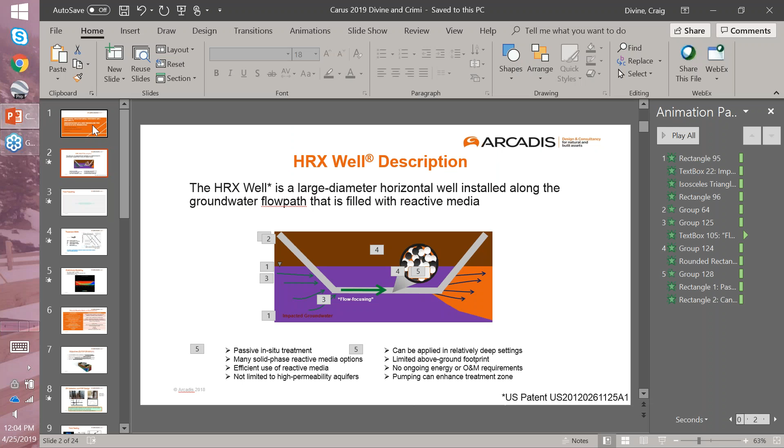Next, we will have Dr. Michelle Crimi. Dr. Michelle Crimi is the Director of Engineering and Management and a professor jointly appointed in the Reh School of Business and the Institute for Sustainable Environment at Clarkson University. Her areas of research interest include the development of in situ remediation technologies for treating contaminated groundwater, chemical oxidation of organic contaminants, impacts of in situ remediation on aquifer quality, and the integration of treatment technologies for optimized risk reduction. She has been PI or co-PI on several research projects focused on the treatment of groundwater contaminants, funded primarily by the Department of Defense Strategic Environmental Research and Development Program, SERDP, and the Environmental Security Technology Certification Program, ESTCP. Her projects are often conducted in partnership with industry and consulting organizations and often have a strong technology transfer focus with the objectives of moving technologies from the laboratory to full-scale adoption by developing guidance, tools, protocols, and workshops to support field application.

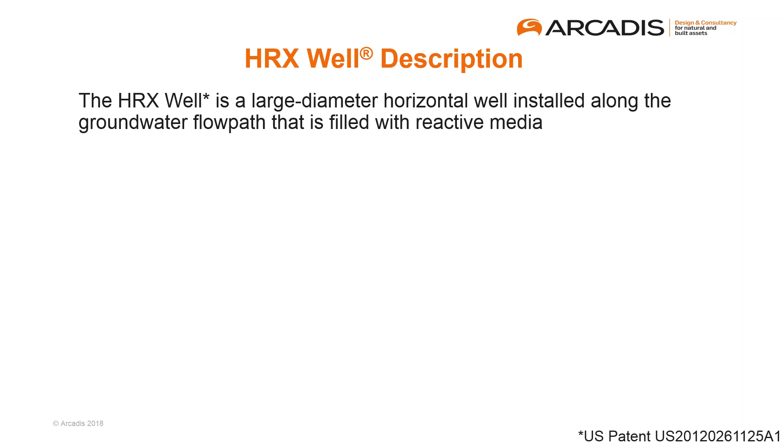So what is an HRX well? It is a large diameter horizontal well. And when I say large diameter, I'm talking 6, 8, 12 inches in diameter, or even larger if possible. That's installed along the groundwater flow path, and it's filled with a reactive media. So if we have a conceptual aquifer here, the triangle represents the water table, the brown is the unsaturated zone, and flow is left to right.

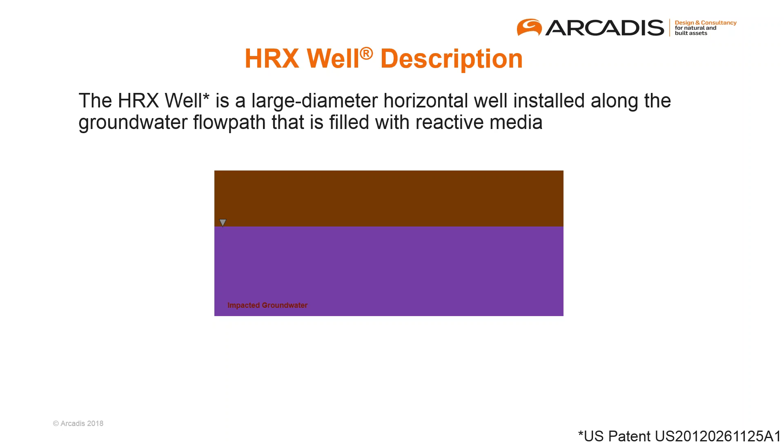You could install this large diameter well, in this case it's a double-ended well, below the water table, again along groundwater flow direction, and then exiting on the down gradient side. And in this case, there would be a screen on the left side, on the up gradient side, and a screen on the down gradient side, and then a cased section in the middle.

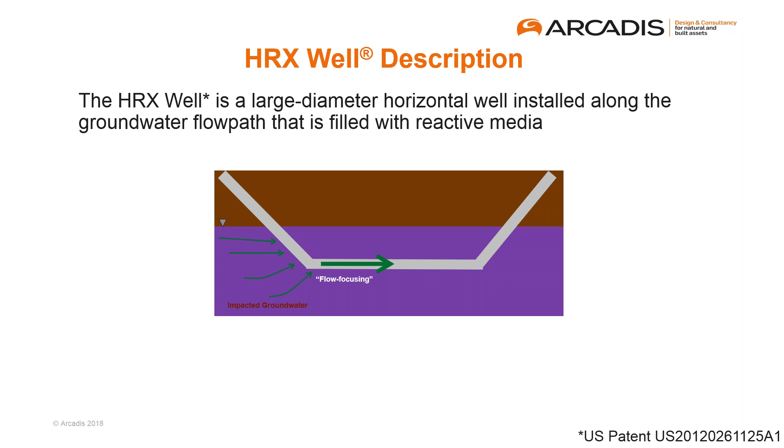And because this large diameter well has a much higher permeability than the surrounding formation, it acts as an engineered high permeability feature, like a fracture or a karst conduit. And therefore, there will be a flow focusing phenomena. That is, groundwater will preferentially flow into that well. And then, of course, while it's in that well, if it's contaminated, it will react with some type of reactive media present in the well, and then flow out the down gradient side treated.

And so, in a sense, you could consider it a form of a permeable reactive barrier, a PRB. And so it has many of the advantages and similarities of a more conventional PRB, like a trench-based PRB. It's a flux control technology, and it's passive. There are some, I think, distinct advantages, though, to this sort of configuration. First is that, of course, you're not as depth limited. Horizontal wells can be installed at much greater depths than trenches, and certainly from a cost perspective, that difference becomes greater as you go to deeper depths.

It has a limited above ground footprint. There's no ongoing operation or maintenance requirements. I think one of the more distinct aspects compared to a conventional trench-based PRB is that because groundwater is focused into that horizontal well, the media usage is very efficient. In many trench-based PRBs, you may have zones of the PRB that don't see a lot of contaminant flux, and yet you need to put media there. And so at the end of the day, you end up using quite a bit of media.

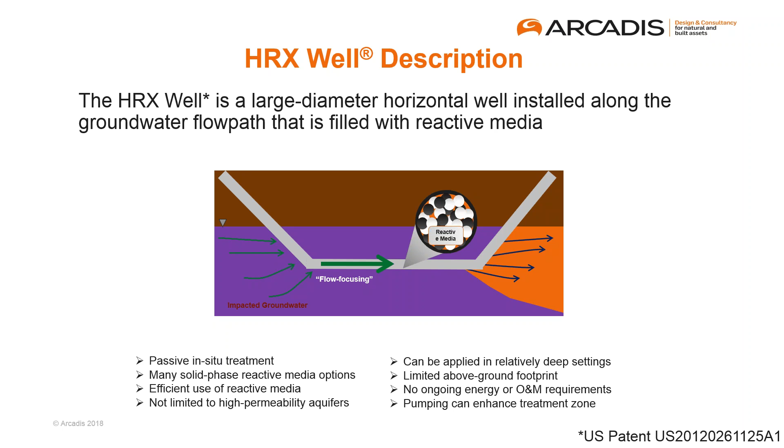And in this case, because of the efficiency of the hydraulics, much less reactive media is used. And I think that creates an opportunity to use much more expensive media because you're using much less of it. So the opportunity to have more tailored or designer media is represented. And there's also the potential to use multiple media types in series to address either pretreatment needs or multiple contaminants.

I present this concept at a few forums, and sometimes the hydraulics are a little bit complicated to envision if it's the first time you've seen it. So I put together this really simple numerical flow and transport model using pFlow, which is a USGS Java-based code, really simple to use. And this is a plan view of an HRX well. So the white represents the surrounding aquifer. The blue would represent the well itself, so a very high permeability. And then the green is the cased section, so no flow across that green.

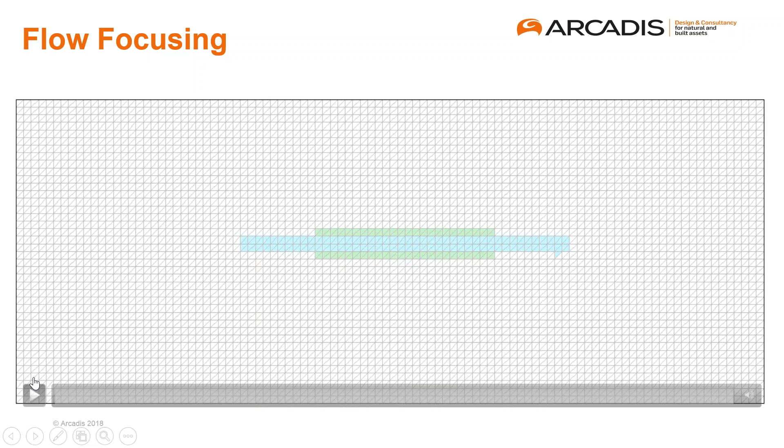So the blue is a very high permeability zone. The green is a very low permeability zone, and the white is sort of a middle permeability zone representing the ambient formation. And of course, this is simply two-dimensional, but it helps understand the hydraulics. So I ran the model, put it into a video, and I'll sort of talk through as it plays here. Again, flow is left to right. And this is the permeability distribution. So you can see the blue is 1 and the green is 10 to the minus 12, and the white is 0.001.

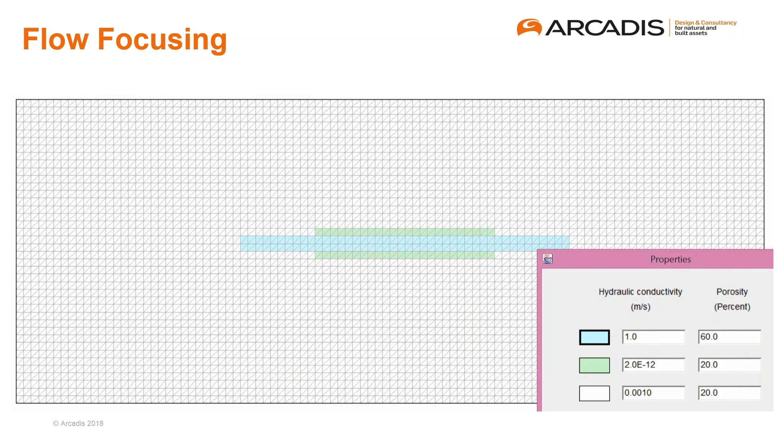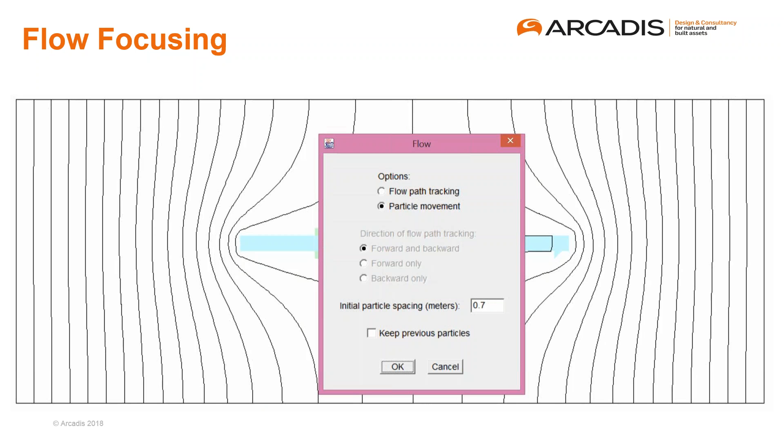So the first thing that we'll do here is just contour the heads. So you can see the head contours, and you can see them bend around the inlet and out of the outlet, and that's what creates that flow focusing. And we can run flow lines. If we start the flow line right in the center, of course, it runs right through the well, left to right. And if we're at the edge of the domain, it doesn't go through the well, but you can see some bending effect.

And as you get closer and closer to the well, that bending effect becomes more severe until those flow lines are captured. And so those flow lines that enter the well, of course, represent the boundaries of the treatment or capture zone. So any flow line that enters the well, and assuming that the reactive media is appropriate, then gets treated.

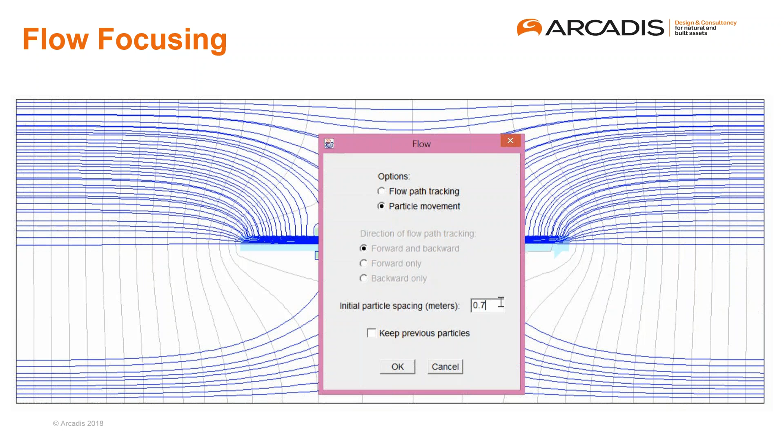And then on the right-hand side, of course, it's symmetrical. That right-hand side represents the treatment zone. And it's symmetrical top to bottom as well. So you get a similar sort of behavior. And of course, this is a simplified system, isotropic and homogeneous, but it at least helps you understand this flow focusing effect. And of course, the degree of that flow focusing relates to the contrast in permeabilities and some other kind of specific aspects of the geometry.

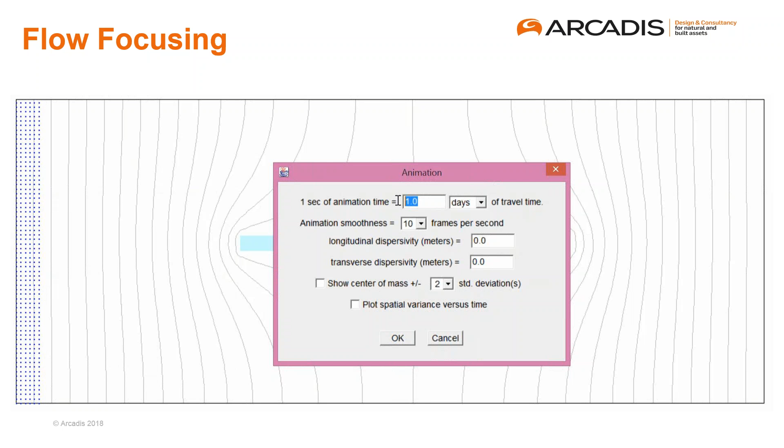In this next part of the simulation, I dropped some particles on the left, and you can see how they'll flow. They'll follow those flow lines, but you also see the relative rate of transport. And so the particles in the middle, you'll see, will transport very rapidly. And then you can see the particles at the end that don't go into the well, that bend toward the well, but then eventually kind of pass by, and again are sort of defined by that treatment zone or capture zone.

Right, so all those ones that went in the well, and on the right side, that's all treated water. And then these particles that are passing by now, passing by the well, that's the untreated flow lines. And then you can see they sort of bend out and follow the contours of that treatment zone. Okay, hopefully that was helpful. So that's sort of the concept.

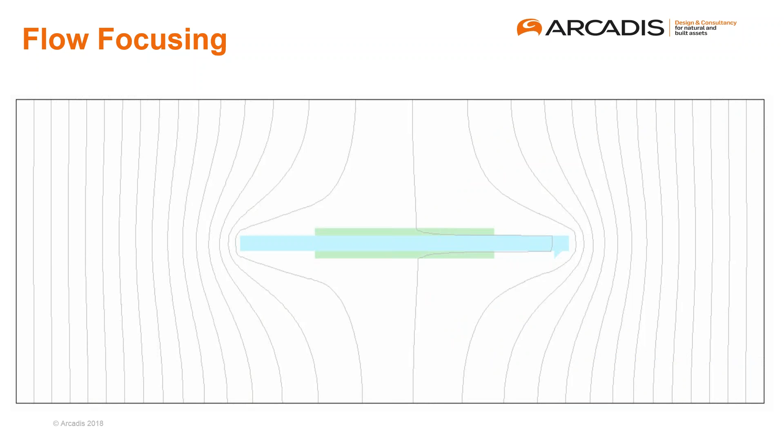So how big is that treatment width? You can take a simple approach just using Darcy's law for a simple aquifer and calculate that treatment width. And this equation really is a relationship between, in the numerator, the amount of flow through the well, so the permeability, the KHRX, the permeability of the material in the well. There, A would be the cross-sectional area, and I would be the hydraulic gradient across the well. So that's just Darcy's law through the well on the top.

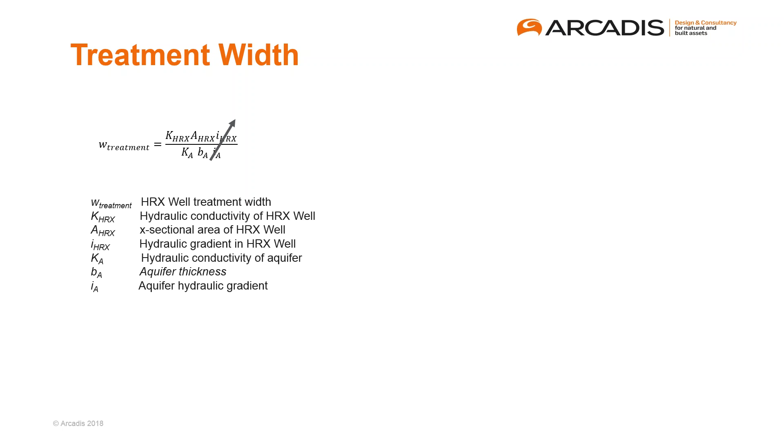And on the bottom, a relationship between the aquifer permeability, aquifer thickness, and hydraulic gradient. And to make it simple, those gradients are similar, although they're a little bit different in a real-world application, but they're pretty similar, so you can sort of strike them out and create a graphic like this that relates the aquifer hydraulic conductivity to the treatment zone width on the y-axis. And of course, these are log scale. And you can see the rough grain size distribution there on the x-axis.

And those different lines, the solid and dashed lines, represent different well constructions and aquifer geometries. So for example, that bottom one that says 8-inch diameter well, an aquifer thickness of 35 feet. If the ambient hydraulic conductivity was about 1 foot per day, you can see the treatment width would be about 10 feet, if you follow that up.

And in contrast, if you use that middle dashed line, that 12-inch diameter well, so larger well in a slightly thinner aquifer, 20-foot saturated thickness. And if you are in an aquifer setting of about 1 foot per day, what is that? That's about 20, 30, 40 feet treatment width. And this assumes that the media within the well is a hydraulic conductivity of about 1,000 feet.

So I think the takeaway, though, from this is that for reasonable aquifer conditions, treatment widths of tens of feet or more are possible. And I think an interesting insight as well is that the treatment width improves with decreasing aquifer permeability. So most in situ remedial technologies tend to perform better the higher permeability conditions you go, particularly if you're an injection-based technology. This is one that actually, at least under passive operation, tends to perform better at lower permeability settings. And again, that's because that permeability contrast is maximized, which creates a larger treatment width.

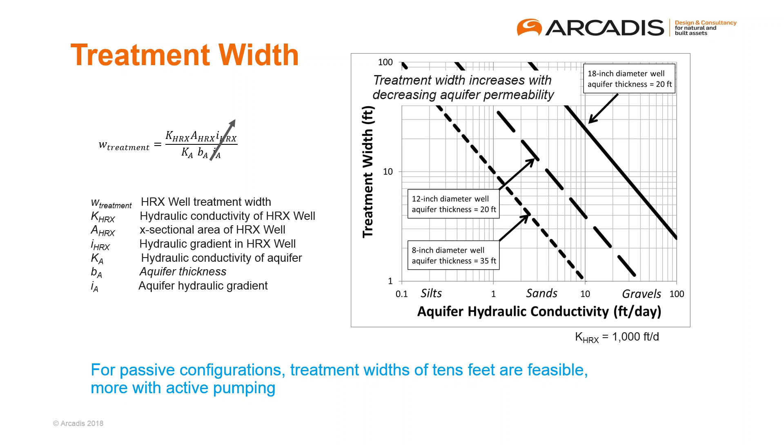But I will note there is a configuration where you could install a downhole pump using a packer system to pump in the inlet side and push through the cased section, and that would allow you to increase your treatment width, particularly in higher permeability settings. But for this presentation, we'll focus on the passive application.

So here's some just simplified numerical modeling, more of a 3D application beyond that simple Darcy's Law calculation. In this particular scenario, the well is 300 feet long. It's a 20-foot thick aquifer. The well is 1 foot in diameter. The aquifer permeability is about 3 feet per day, and the HRX material has a permeability, hydraulic conductivity, about 3,000 feet per day. And the average treatment width in this model is about 40 feet, and if you use the equation I showed you before, it calculates to 39 feet, so pretty close.

Again, flows left to right. The white lines represent equal head, and in this still you can see them bending on the uphill side, and then you can see them bending on the downhill side, which creates flow in and out. And then the color flood represents the treatment zone. So red would be a starting concentration of 100, and the real cool colors represent clean.

And in this particular scenario, actually the whole well was screened. So at any point, particles could flow in and out of the well. And they, for the most part, stay in the well during the run because it's more permeable in the well, and the water does not leave the well until it basically hits the end of the run.

And so this model will spin around. You'll see both a plan view and side view. And then sort of near the end, there's a green iso shell of the treated zone. Gives you a little sense for the geometry. And I will note there is a kind of a geometry that's interesting, but is somewhat exaggerated because of the vertical exaggeration here.

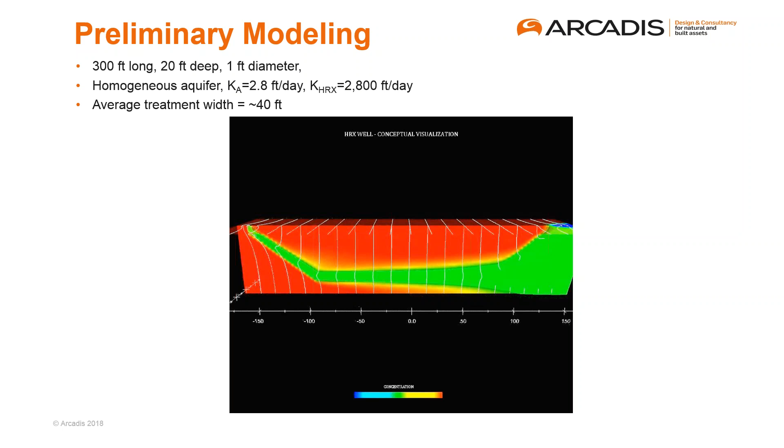I mentioned, I think one of the real exciting aspects to this technology is the potential to use a variety of reactive media types because the reactive media usage is so low. In fact, for the field application that we'll show here in a few minutes, we used zero valent iron to treat chlorinated solvents and only used 1.5 cubic meters of ZVI for the whole thing. And we have a life cycle of decades based on that media. So very little reactive media.

So when you start thinking about that, the potential applicability to a really broad contaminant suite is, I think, quite exciting. So these are just some concepts, and Michelle will be talking later about the design model that we're putting together, and some of the parameters from these various media types would be used in that design model to understand the amount of and type of media needed for any specific field application.

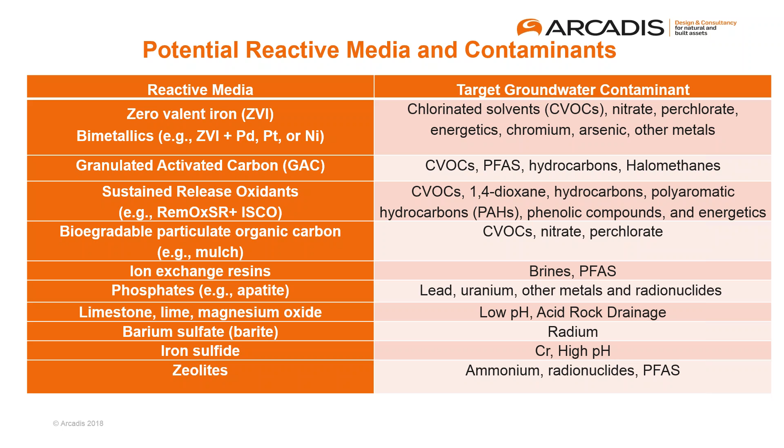Okay, so based on this preliminary work, ESTCP funded a field scale demonstration really to validate the technical performance and to understand actual implementability and cost performance data and also sustainability information. And then as part of the final deliverable part of the project, we'll be developing a user tool and guidance.

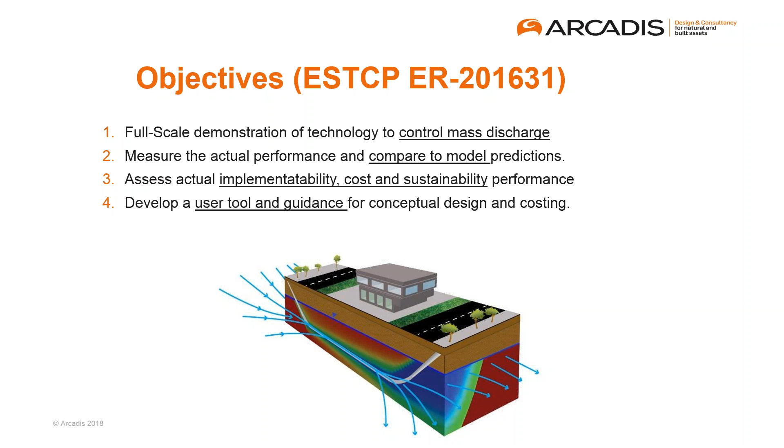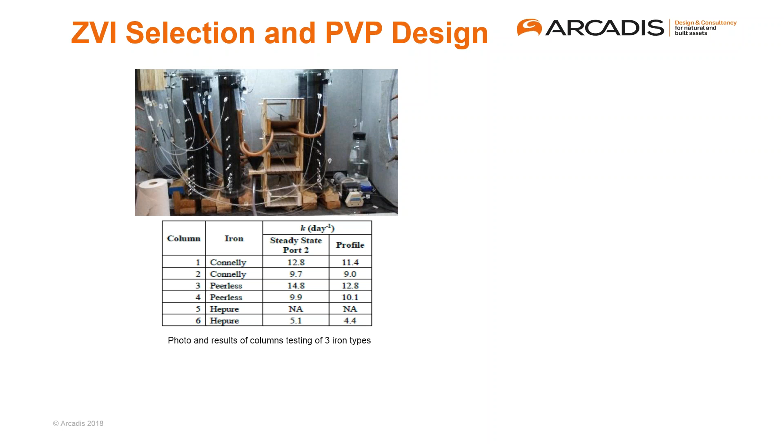So one of the first things we looked at as part of this was identifying the appropriate reactive media. We had selected a site, in fact, we had targeted using ZVI to treat chlorinated solvents, primarily because that's a well-established treatment technology, and there are plenty of ZVI vendors. So we worked with Rick Devlin at the University of Kansas to test a variety of media types, and we were looking at balancing both reactivity of that media alongside permeability, trying to both maximize permeability and reactivity. Without going into the details, based on that testing, we selected the Connelly iron.

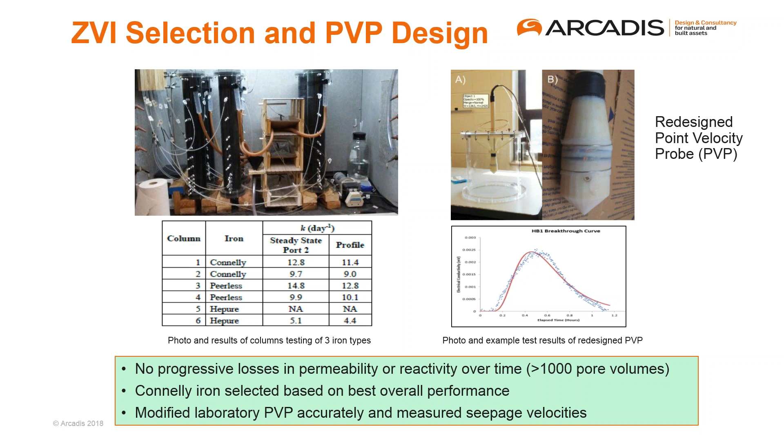A couple of key takeaways. We found no progressive loss in permeability or reactivity of the Connelly iron using site groundwater with well over 1,000 pore volumes flushed. And as I mentioned, we selected the Connelly iron, and we were able to modify Rick's PVP design to be applicable for the HRX well setting.

And Michelle, maybe I'll turn it over to you on the next couple of slides, let you talk about the work you guys did at Clarkson. All right, thanks so much, Craig.

Just a little heads up, my internet connection is uncharacteristically going in and out, so if you lose me, I'll have to ask you to jump in and take over, but it looks okay right now.

At Clarkson University, we conducted lab and pilot tests to validate HRX well capture, hydraulics, and treatment. Our first set of tests were with a relatively small scale laboratory system, which you see as that 55-gallon drum. We essentially created an aquifer in that drum and then placed an HRX well, a mini one, within that tank. We operated it in upflow mode. So it's basically an aquifer tipped over 90 degrees. So the water is introduced at the bottom and flows through to the top.

We measured the flow rate through the well and through the aquifer, and we put in a series of piezometers throughout that tank so that we can measure the hydraulic head, and this enabled us to determine the well capture within that tank. We compared this capture to the simulations. You see example simulations there on the left of the tank.

So some example results that we got are shown in the top right figure, and what you see there is that as we vary the ratio of hydraulic conductivity in the well to the hydraulic conductivity in the aquifer, as you see on the x-axis, the ratio of flow through the well and through the aquifer responds linearly and as predicted, as Craig talked about earlier. So in other words, the greater the difference in hydraulic conductivity, the more water the well captures.

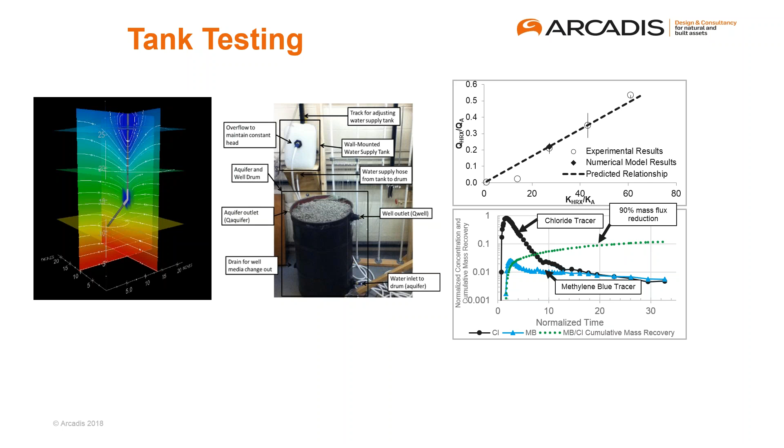We also conducted tracer tests within this tank. We packed the well with carbon. We used a conservative salt tracer and a sorptive dye tracer, the methylene blue you see in the bottom right figure. And what we found here is that everything behaves as we would want it to. We saw chloride, the conservative tracer, break through 2 times faster than the methylene blue. The peak concentration was 35 times greater, and the mass recovered was 20 times greater for the salt at the well outlet. So the well was capturing and sorbing that methylene blue dye tracer, as we expected. So results looked really good at the laboratory scale.

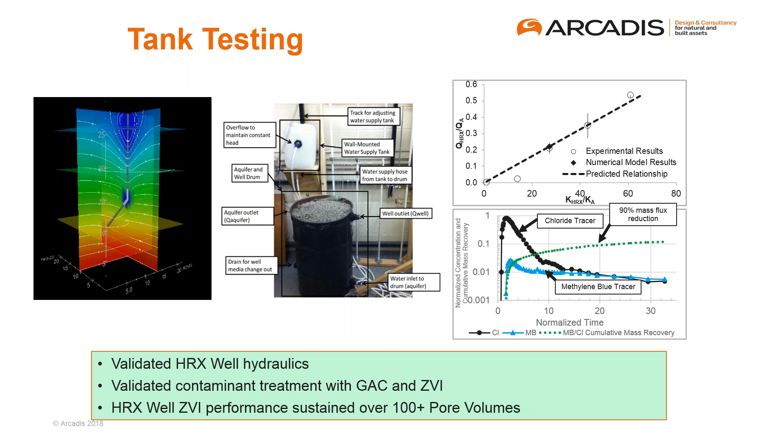We were able to validate the well hydraulics. We validated treatment using GAC. And we also used ZVI. We didn't test treatment with ZVI, but we did test hydraulic performance in the lab tank with the well packed with the ZVI. And it sustained capture and flow through for well over 100 pore volumes of throughput through that tank. So based on the results of the lab tests, we then moved to pilot scale testing.

And I have to admit, this was probably the most fun project that we've ever worked on here at Clarkson. They let us build a test pit right here on campus. It's 20 feet long, 6 feet wide, and 6 feet deep. We first modeled the system, as you see on the top left, to simulate flow. We used those simulations under a bunch of different design test conditions to come up with the final design of the well, which you see in the top middle, as well as to design the monitoring network. We had over 40 piezometers installed throughout the test pit, along with an 8-inch horizontal well.

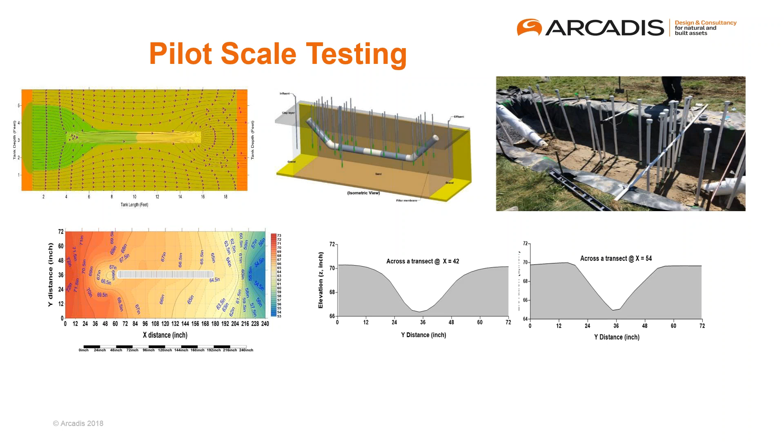So we measured water levels to prepare contour plots. This allowed us to compare the capture that we actually achieved in the field with those that were simulated, and to make comparisons between predicted and measured values. So example contour plots that we created, you see on the bottom left there. And then based on those contour plots, we could assess the capture width at different distances along the transect, as you see in the examples in the bottom middle and bottom right. What we see is the results, again, compared quite well with predicted.

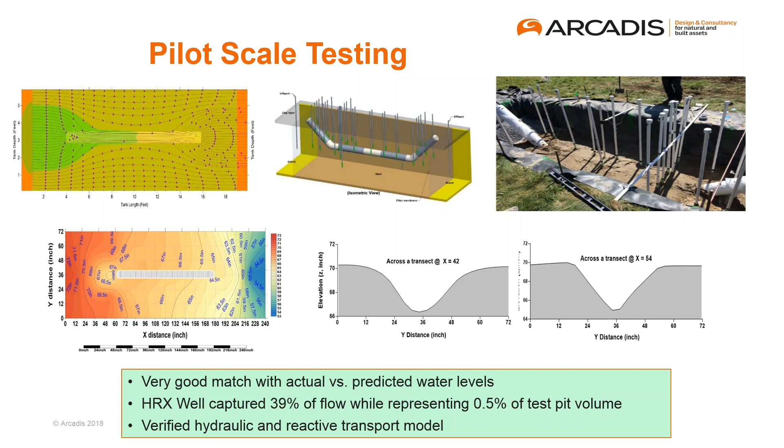It also just simply validated the concept of HRX well passive capture. Our 8-inch well captured a width of over 40 inches of water, and it captured 39% of the flow that was introduced to the test pit, while only occupying 0.5% of the total volume in the pit. So we were able to verify the hydraulic and reactive transport model, and we'll be moving forward with those to create a design tool, which I'll be talking about in a couple of minutes. So with that, back to you, Craig.

Great, thanks, Michelle. So based on all that laboratory work and validation of the concept and the numerical model for use as a design tool, we proceeded with field demonstration at the Vandenberg Air Force Base in Central California.

This was selected because the aquifer thickness was relatively thin. There was a high concentration of chlorinated solvent, specifically TCE. The goal was to control flux from that high concentration zone. You can see that on the plan view there on the right. That purple you can see is over 50 parts per million.

In this case, flow is left to right, and the idea was to create a treatment zone in that downgradient screen zone there on the right. Depth of groundwater was about 22 feet. Average hydraulic conductivity was about a tenth to maybe a half a foot per day. So relatively modest to low, and kind of in that zone that you really couldn't inject readily into without high pressures or fracturing the formation.

HPT data on the right identified that target zone. You can see the deflections in flow and pressure. Again, it represents about 7 to 10 feet of aquifer thickness. The bottom photograph on the left shows roughly the orientation of the well. In fact, if you see that tree on the left, and then you look in the aerial near the purple there, you can sort of see the outline of that tree, and the well goes underneath this very active road.

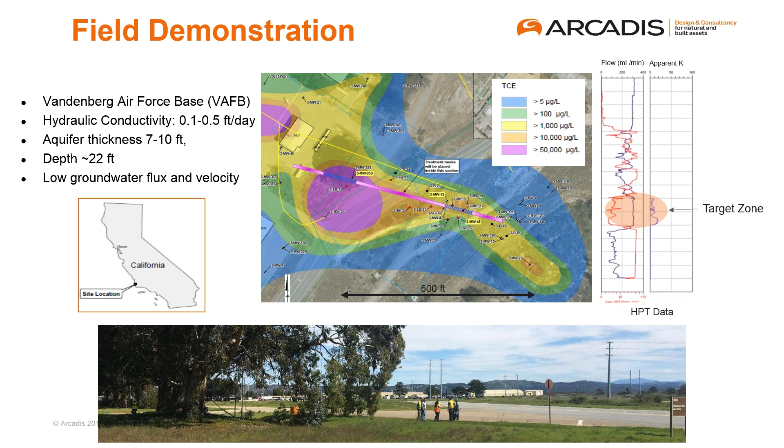So this site also, I think, highlights one of the benefits: that it can be readily applied in an area of active infrastructure, very low surface footprint at the end of the day. So in that photograph, the well basically runs just to this side of the tree, almost underneath where the people are standing, underneath the road toward that power pole to the right.

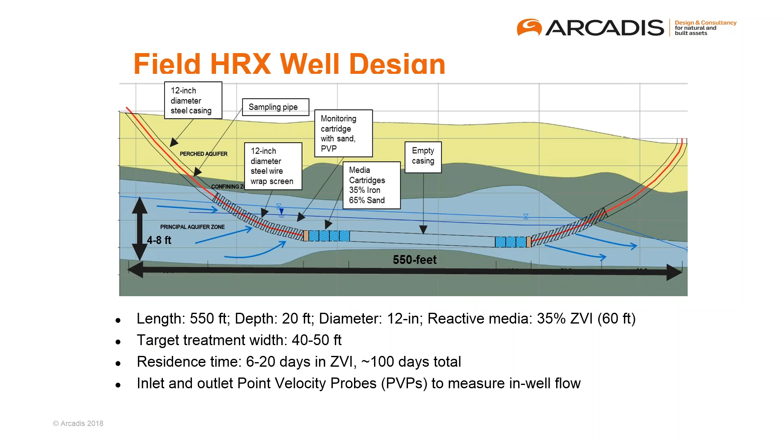So based on the design model, it suggested we would have a treatment width of 40 to 50 feet, or maybe a little bit more, with a residence time of 6 to 20 days in the ZVI. And roughly our model predicts about 100 days of residence time from end to end, screen to screen. As I mentioned, we put PVPs on the inlet and outlet to monitor flow. And of course, we have sample ports in the well itself, in the screen zones on each side, and then nearby monitoring wells.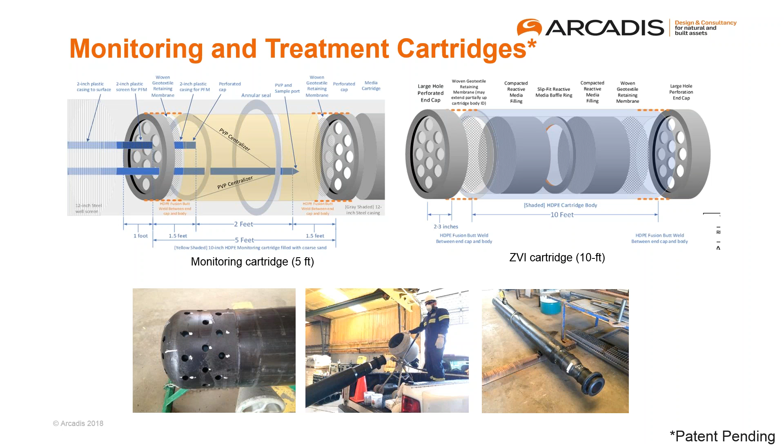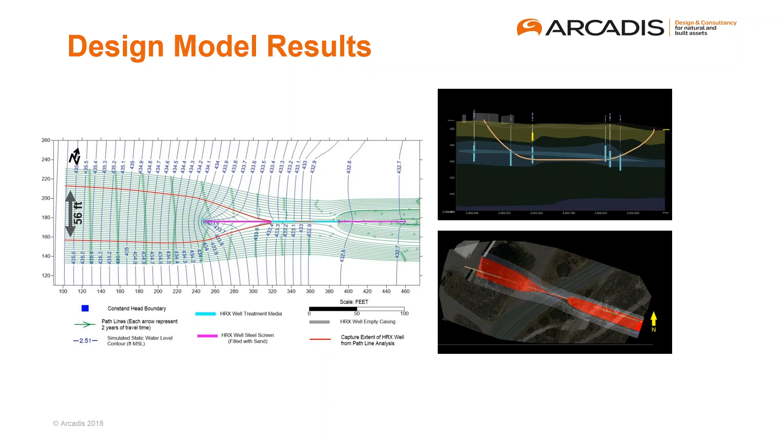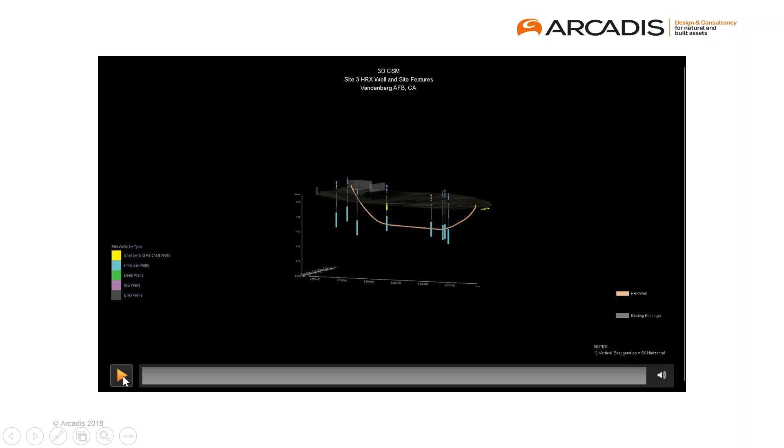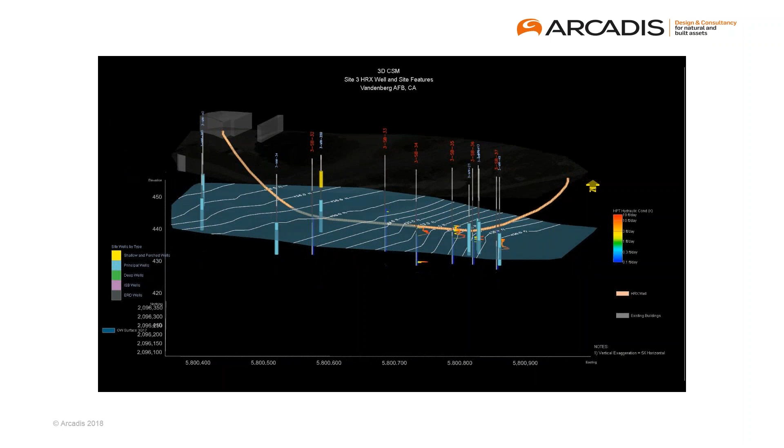And actually I have a video of some of the numerical design model output. You can see the orientation, the planned orientation of the well, along with the locations of nearby monitoring wells. We hung some HPT data. You can see the lithology there implied in the different colors. And again, this was really valuable in helping us optimize well design details and location and configuration.

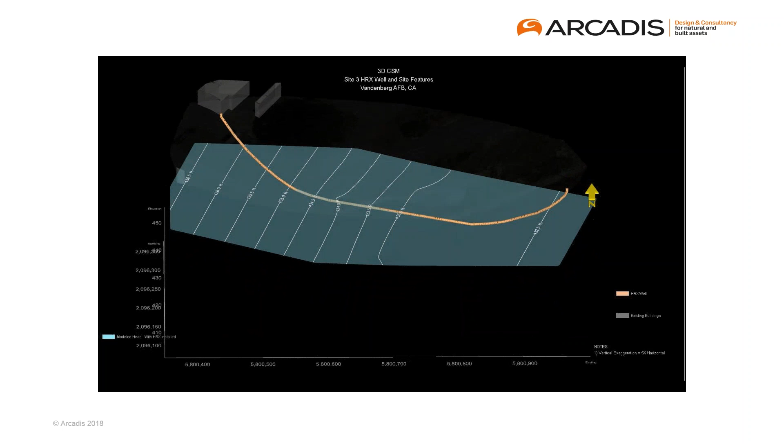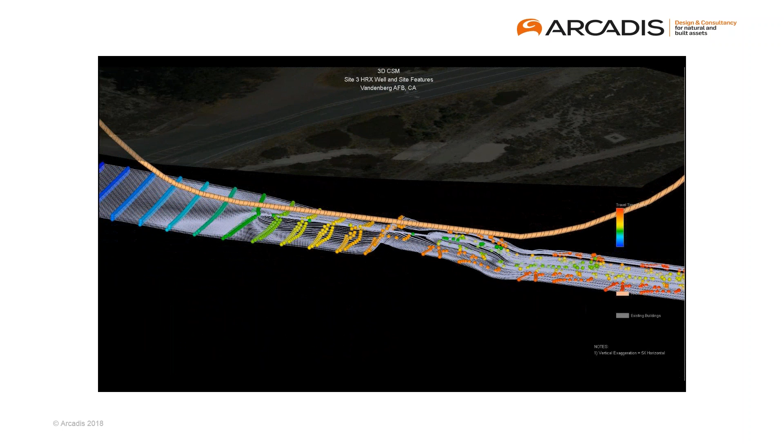These path lines show the anticipated treatment zone, capture zone, and then these dots represent essentially timestamps, or you could think of them as particle paths. The cool colors represent short times and the red long times. And you can see within the treatment zone there on the right, those particles move through faster, just like on the first video I showed.

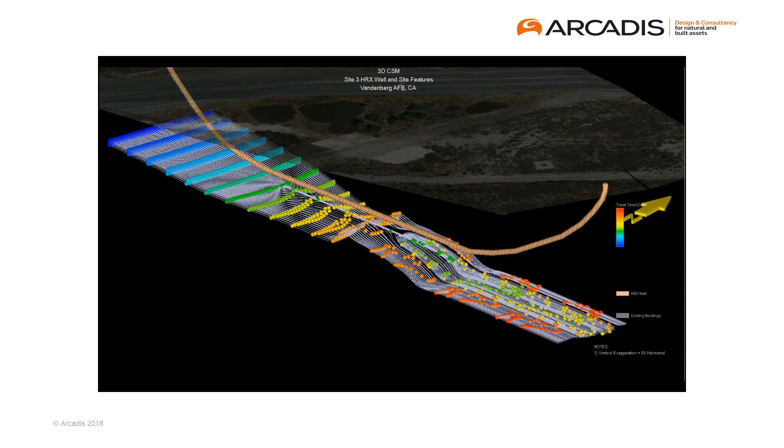One more comment. Before we proceeded with field installation, we considered how an HRX well approach might compare to other conventional flux control technologies. So if your objective was to create a clean line in perpetuity, so control flux across a plane, the other two practical or conventional alternatives would be a pump and treat system, a series of wells along the transect, or a funnel and gate PRB type of approach. And we compared them against some conventional criteria like overall protection of human health, effectiveness and permanence, likelihood to create reductions in toxicity, mobility, and volume through treatment, implementability, sustainability, and life cycle cost.

And they all compared very favorably. Of course, the HRX well has the potential to have a much higher sustainability benefit. There's very little ongoing energy and certainly no consumptive water associated with it. And the other thing I'd highlight is that the life cycle costs were right in line. In fact, our initial calculations came out a little bit lower than other conventional technologies. And so far, our field implementation continues to validate that cost range.

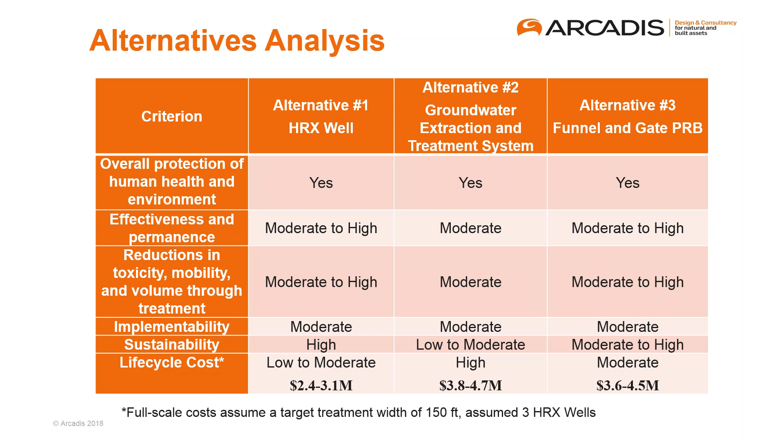A key assumption in this case would be that the HRX well itself has a treatment width of about 50 feet, and so to treat a target width of 150 feet, you'd need 3. Obviously, those costs will go up if you needed 4 or 5. The cost for additional wells would probably be $250,000 to $300,000 a well. So even if you went up to 4 or 5 wells, that doesn't price the HRX well out of the range compared to the other technologies. So again, based on this, we proceeded with field installation last summer, late July, beginning of August.

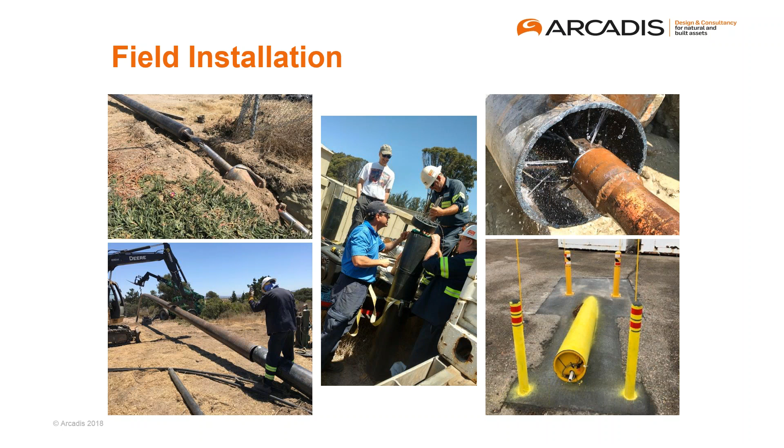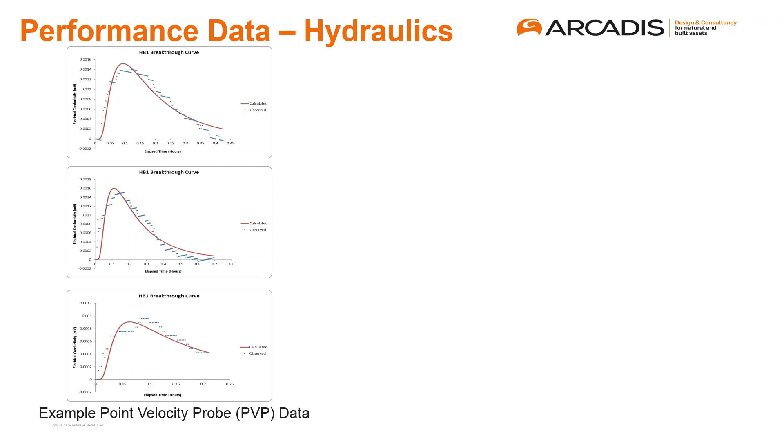All right, so I'll talk about some performance data so far. So these are some example PVP data sets from the outlet side. So again, this is the small scale tracer test tool that's monitoring velocity in the HRX well itself. And these data, of course, are pretty clean, and you can see the elapsed time is quite short, tenths of hours for that tracer to break through. And these translate to velocity within the media of about 8 to 10 feet per day.

And our goal was between 5 and 10 feet per day. So we're right in line with what the model suggested we should be able to do. And just in context, the groundwater velocity in the aquifer is around 1/10 of a foot per day. So dramatic flow and velocity enhancement. Based on that velocity, we got a residence time in the ZVI of about 9 days, and we were targeting 8 to 20 days. So that's consistent with the design.

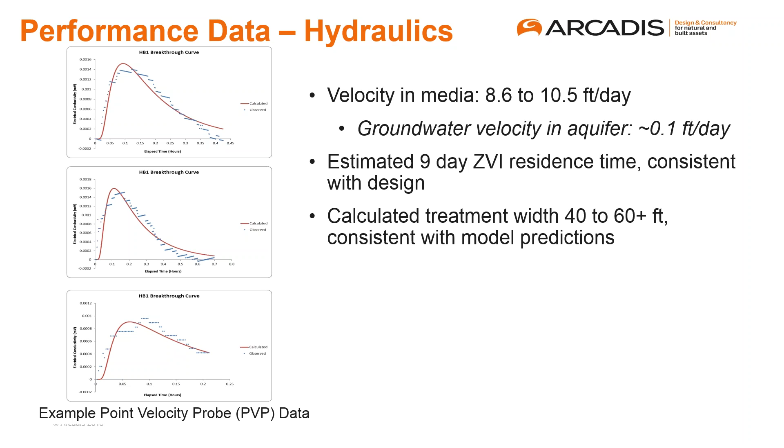And we're still working on finalizing the calculations of treatment width, and we're updating the numerical model based on some additional site data, but it's looking like our treatment widths are in the 40 to 60 foot range, which is consistent with model predictions.

Also, we did do a short-term pumping test where we placed a pump in the inlet screen, and rather than bring that water to the surface, we pushed that water through a packer into the cased section, and then it was forced through the treatment media and then out the outlet well. And that validated that the engineering design was feasible.

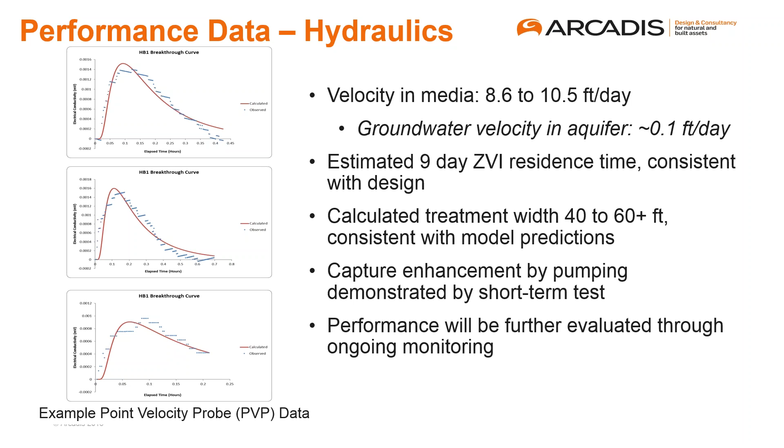And again, that wasn't the primary design for this site because it's a low permeability site, but for high permeability settings where you can yield more water, that can be used to enhance treatment width. And we'll continue to monitor performance through the balance of this year and into next.

All right, so I'll share some concentration data. We'll start with this graph. On the left is the upgradient well, immediately upgradient of the screen, within maybe 20 feet of the screen, MW35, and you can see on the bottom there we have baseline and the days since well installation, and you can see pretty high concentrations. And then 92 days after well installation, there's a notable increase in the ratio of cis to trichloroethene, and not as severe later on.

And then of course on the HRX inlet, that inlet should look just like 35D, but there's no TCE and quite a bit of cis, and that's likely due to the fact that we used a biopolymer, basically a guar, as part of the drilling fluid, and a lot of that fermentable carbon was left in the aquifer and actually even remains to this day. And in fact, you can see we had 2 inlet well samples. That second inlet well sample, 184 days after installation, we took a TOC measurement, and it was still 339 milligrams per liter. So we're getting some definite treatment benefit from ERD type processes.

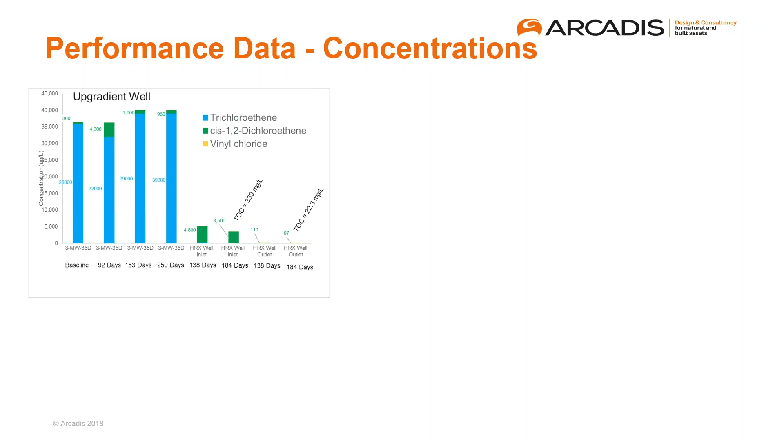But despite that, you can see on the outlet side, dramatic reduction in cis concentrations. So we go from 4 or 5 ppm to 100 ppb, and even on the outlet at the 184 day mark, there's still 20 ppm of TOC. So clearly there's some ERD performance, but absolutely what's going through the HRX well, 5 parts per million of DCE, is getting treated. So the chemistry is validated. And that's maybe a 98% treatment.

And then we do have some brand new data from the monitoring wells on the outlet side. In fact, you guys are the first group to see this data set. Just came in yesterday. There's some really good data here. So again, this is the outlet side, and you can see a handful of monitoring wells, 3MW13 and 3MW14 on the top of the image, and then on the bottom, 3MW47 and 48. And these are within tens of feet of the outlet screen. And our prediction based on the model was that we'd see treatment in these wells between 200 and maybe 500 days based on the flow rates.

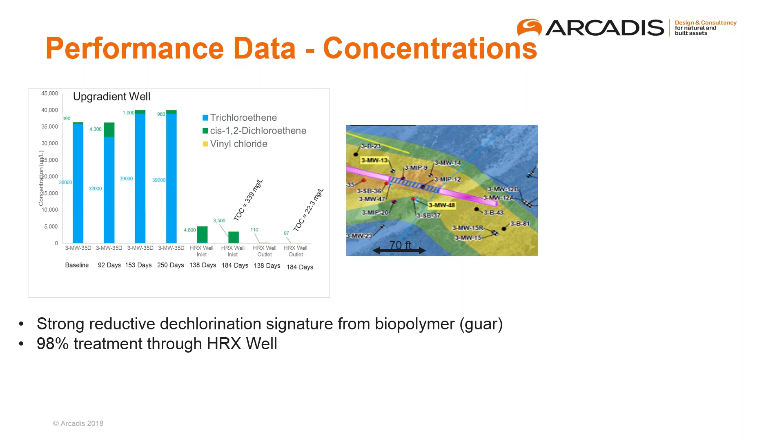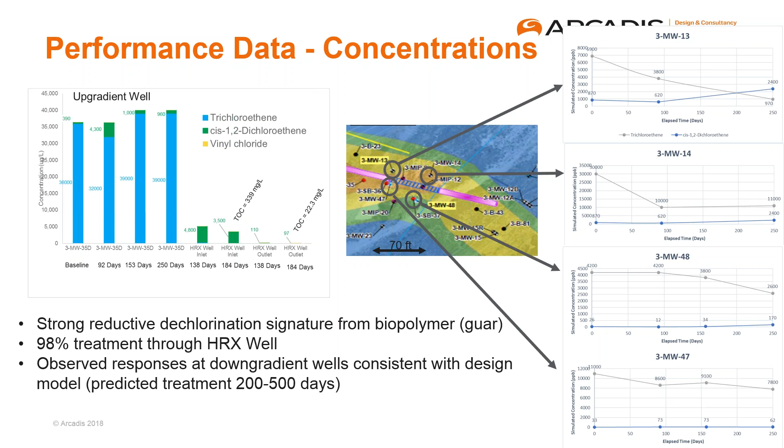But also validating a treatment zone that is tens of feet and would be consistent with ultimately a 50 to 60 foot treatment width. All right, and with that, Michelle, I'm going to turn it over to you for the design tool.

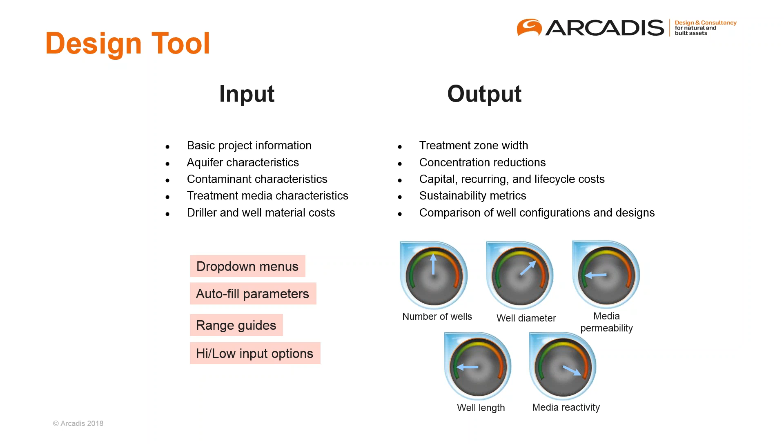All right, I know we only have a couple minutes left, so I'll try to work quickly here. We're working to develop a simple Excel-based design tool to simulate capture and treatment through the HRX well, as well as treatment costs and the sustainability parameters. When the user enters site-specific factors that affect design, such as aquifer properties, contaminant properties, media properties, installation and operating costs, this tool will ultimately tell us how much water we're capturing, the extent of contaminant treatment, and what that cost looks like. It'll be a conceptual design tool that will enable users to compare that to other possible approaches that may be considered for a site.

So our goal is to use simplified equations, those based on Darcy's law that Craig showed earlier. That will enable us to have a very fast and user-friendly Excel-based tool rather than relying on more complex numerical models. However, to assure that the simplified equations are robust and accurate enough to guide design, we did work on building a finite element numerical model. And we varied a wide array of input conditions, and we compared the resulting output for the numerical model, for the simplified equations, and our actual field measured data.

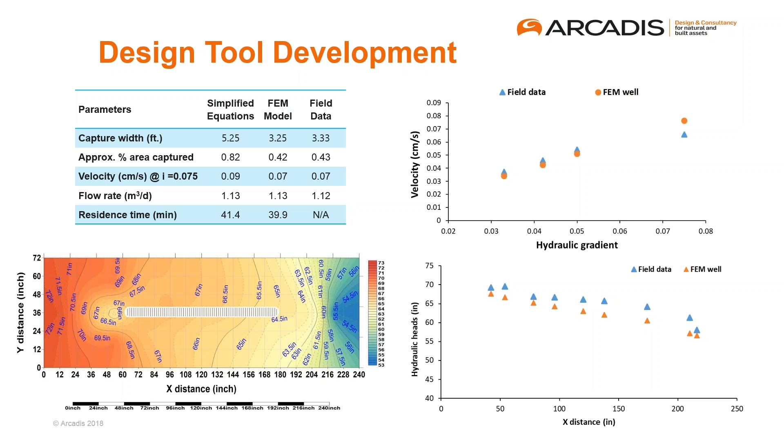As you can see in the table in the top left, the numerical model and the field data match really quite well. The simplified equations aren't too far off, but what we're working on now is adjusting those simplified equations to account for some of the microscale effects that aren't currently accounted for in the simplified equations, but are important once we start operating at scale. And so ultimately, we anticipate something that'll be fast, easy to use, and give a lot of information with a reasonable amount of input that would be at a user's fingertips.

We're also going to be doing site sustainability analysis using SiteWise, a common tool to determine some of the key sustainability metrics such as energy use, greenhouse gas emissions, and safety across the life cycle of HRX well installation and operation. And these will be used for our ESTCP project. We'll be calculating the same parameters for an equivalent pump and treat and PRB treatment system, similar to the early comparisons that Craig showed you. And so we'll be doing this in a great deal of detail for the project, but ultimately we're going to be rolling up these sustainability metrics into the user-friendly design tool. So the tool will incorporate many of these sustainability parameters.

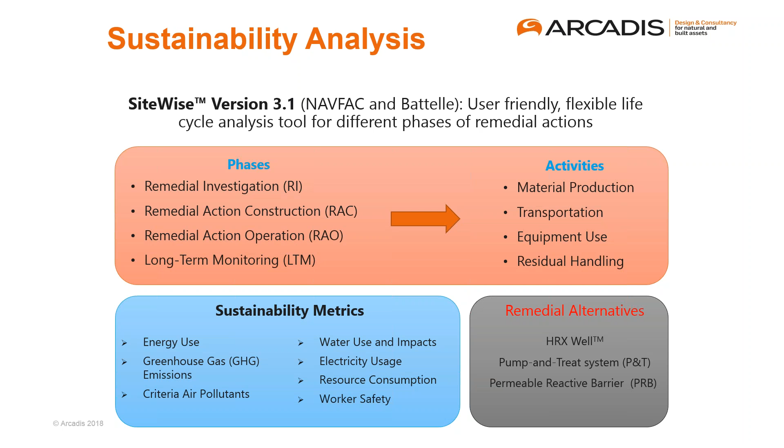The preliminary analyses, as Craig mentioned, showed that the impact of the HRX well treatment looks to be lower than comparative technologies due to passive flow, less water use, and also really effective and efficient use of the media. So this has been a build-up process, and we hope to have something ready to roll to evaluate in more detail in the next couple of months.

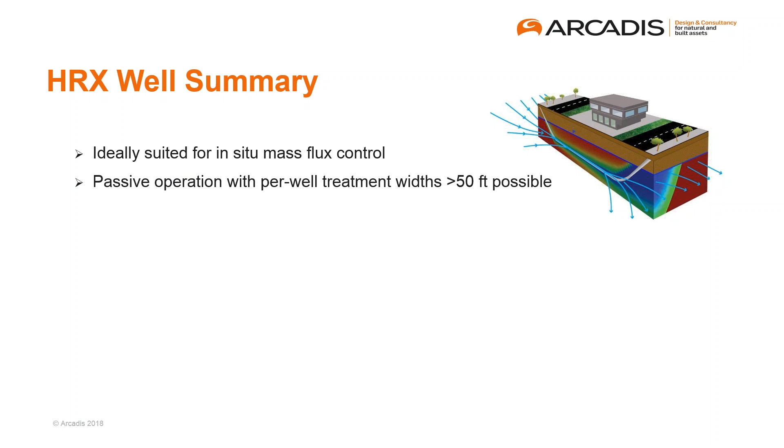Great, thanks, Michelle. So maybe just in closing, I put together just a few key points. If there's anything you've got to remember, I would say the HRX well concept is ideally suited for sites where you're looking for in situ mass flux control. It's, at least as we've shown here, a passive operation, and for the right geologic conditions per well, treatment widths of 50 feet or more are possible. As I mentioned, capture zone size could be enhanced with pumping. There are a wide variety of reactive media options, and therefore it's applicable to many contaminants, including potentially PFAS.

There's very efficient media usage. And actually the change out of those cartridges is straightforward. We recently did a servicing and had no trouble at all pulling one of the monitoring cartridges out and placing it back in. Limited above ground footprint, no ongoing energy, water, O&M requirements. And again, just to restate, there's a really favorable life cycle cost and sustainability comparison, at least for many applications, to pump and treat and PRB.